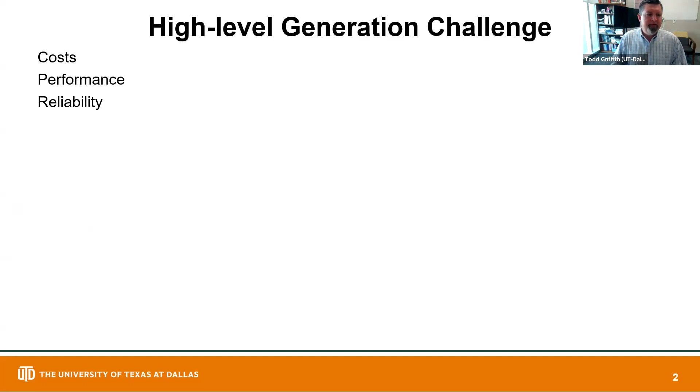I want to start with our high-level challenge for designing a renewable energy generation system. Anytime I start a design problem, the three things I'm primarily thinking about are cost, performance, and reliability. Costs need to be competitive with other generation sources. To do that, we need high performance in terms of efficiency of the generation system. And of course, the system needs to be reliable, providing power for its 20 to 30-year design life. The primary metric we focus on is the levelized cost of energy, or LCOE—this is dollars per kilowatt hour or cents per kilowatt hour, the generation cost of electricity.

We can think about cost, performance, and reliability folding into the terms on the right-hand side of the equation. We have upfront capital cost, our capital expenditures. In terms of performance, we're focused on AEP, the annual energy production over the lifetime of the asset. And then we have operational expenditures over the lifetime of these machines, including operations and maintenance costs, which is where the reliability factor comes in. So in order to keep the LCOE low and competitive, we need to focus on cost, performance, and reliability.

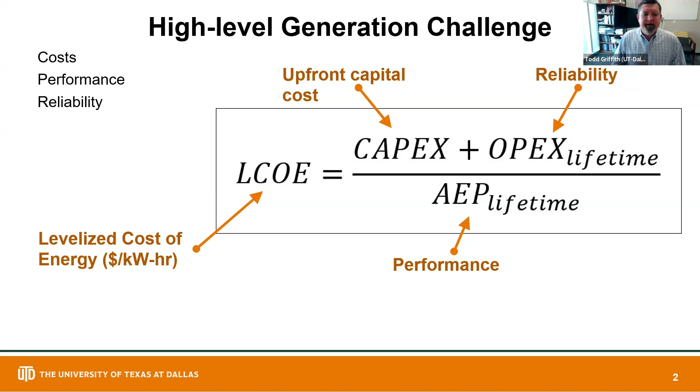Most of my presentation today is going to look at research we're doing related to offshore wind, and at a high level there are a number of opportunities and challenges. In terms of opportunities, offshore wind is important because these wind farms can be placed in relatively close proximity to major population centers that live on the coast—think East Coast, West Coast. The wind resource is very consistent and strong. There's a lot of space out there, and we're not limited in terms of size. These are truly massive extreme scale machines—we're talking blade lengths of over 120 meters, so the length of a blade is more than the length of a football field. Going offshore also has lesser issues in terms of transporting these large components.

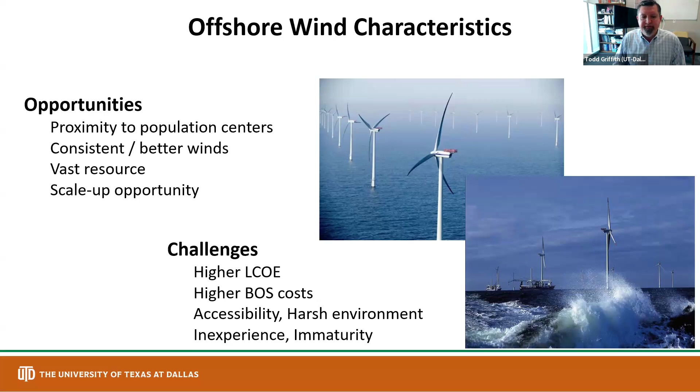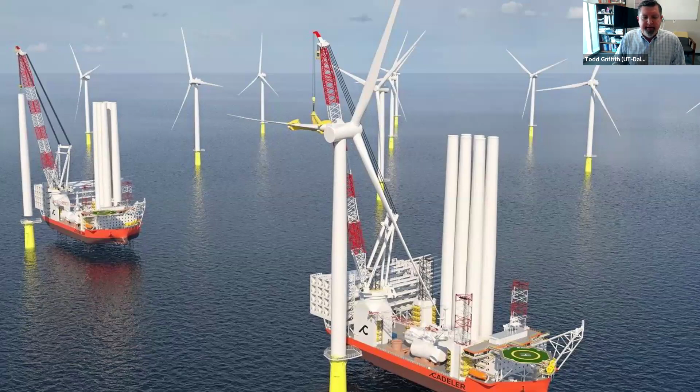Here's a schematic showing an artist's rendering of what an offshore wind farm installation would look like. One thing I want to emphasize are these two large vessels—jack-up vessels. These are ships that can go to port, pick up blades, towers, mechanical components, the nacelle. They house a large crane. They move to site, and then they're jacked up—they have long feet that extend down to the seafloor and jack up the hull of the vessel. Then the crane installs the components piece by piece. This typical process can take many days or maybe several weeks to install a single machine.

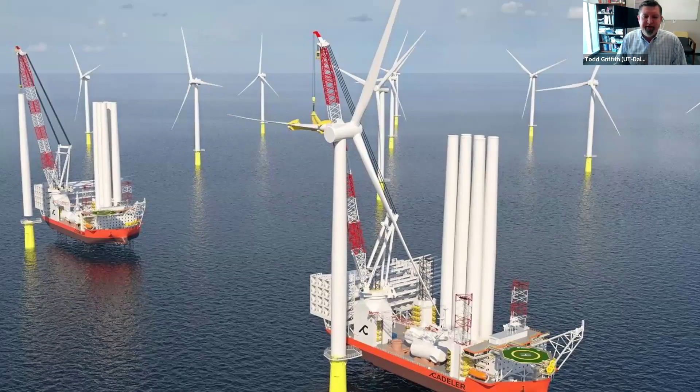There are a number of machines on the market today as well. This is truly a global industry. In the US, the top wind turbine supplier is General Electric, GE. Goldwind is a major supplier in China and growing around the world. Then there are two major Danish manufacturers, Vestas and Siemens Gamesa. These four companies constitute a really large percentage of the overall market.

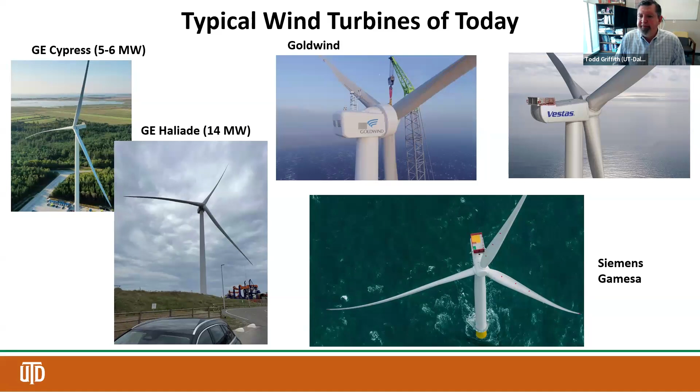I wanted to comment on siting as well. Where are we seeing the most activity? In terms of siting wind turbines and wind farms, it's kind of like real estate—location, location, location. If we look at the upper right plot, we see a graph of wind speed at an elevation above the ground of 80 meters, and that deep red color is the highest average wind speeds on the map. It's mostly concentrated in the U.S. Great Plains area, the central and mountain time zone area. That resource is very strong, there's more ability to capture power there, and that's where we've seen, as you might expect, most of the installation in the U.S.

Over the past 20 years in Texas, Oklahoma, Kansas, Iowa, and many other states in that area, and really there's significant growth in New Mexico and Colorado as well in recent years.

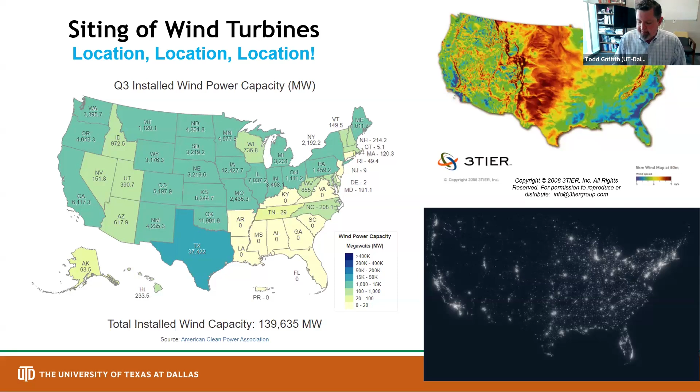One of the challenges is transmission. If we look at sky glow in the lower right, we see an indication of where the major population centers are in the Northeast U.S. and along the West Coast. So one of the challenges has been transmission of this power, but also it opens up a lot of interest in offshore wind as well, having power generation much closer to the end user.

There are a number of other benefits too. Landowners and local communities receive lease payments and tax payments as well, and that can account for hundreds of millions of dollars of annual revenues and incomes.

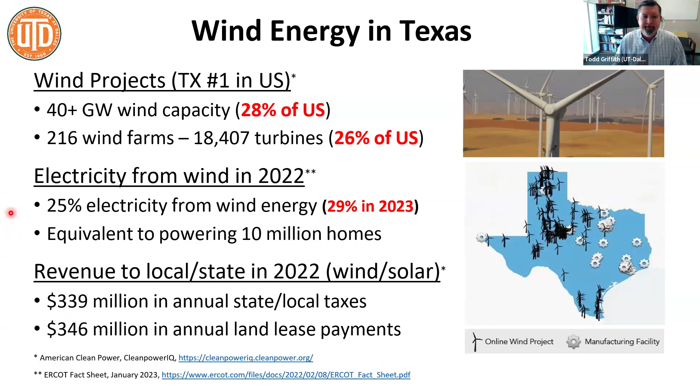And then, kind of the last slide here on this introduction, just looking at a few of the industry trends and challenges. I mentioned these are the largest rotating systems in the world. We're looking at towers up to 150 meters in height, blades 110, even up to 140-meter blades out there now as well. Cost is a big factor.

And then you see an image down here of transporting — now that's a 37 meter blade. So just imagine transporting a 70, 80, 100 meter blade.

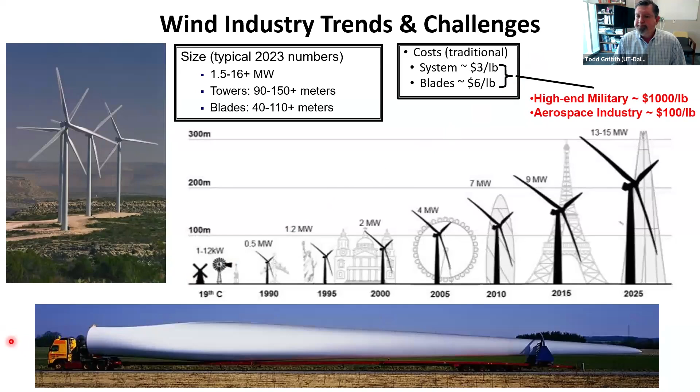So the rest of this, I'm going to dive into some of the technical work. The first thing I want to cover is some of the work we've been doing broadly in the area of wind turbine design. Hopefully by now you've kind of gotten an idea of some of the challenges in terms of going bigger and bigger, and thinking about how we're designing these systems for relatively harsh environments.

If we're going offshore, we have to design for the worst conditions that machine might see — it could include maybe a hurricane type wind. If we're on land, we have to design for major storm conditions. A lot of the work that we've done in our group has really been focused on exploring the limits of the technology, especially going bigger and bigger. Years ago, we did a 100 meter blade design at Sandia.

Since then, we've gone on to do up to a 250 meter blade design, which is structurally feasible. But no matter what the size of the blade, there are a number of structural design requirements that must be satisfied. So let's say we're designing a blade — you see a CAD model over here on the left side. When we're designing that blade, we need to check a number of failure modes, including what you see here on the right.

Strength check under extreme loads, deflection — we need to make sure the blades do not deflect enough that the blade tip would strike the tower, which is very catastrophic. Fatigue life — these machines must last for their 20 to 30-year design life. Blades are thin-walled structures, so we need to check buckling. And these are rotating systems, so we need to check dynamics and flutter, making sure the system is dynamically stable.

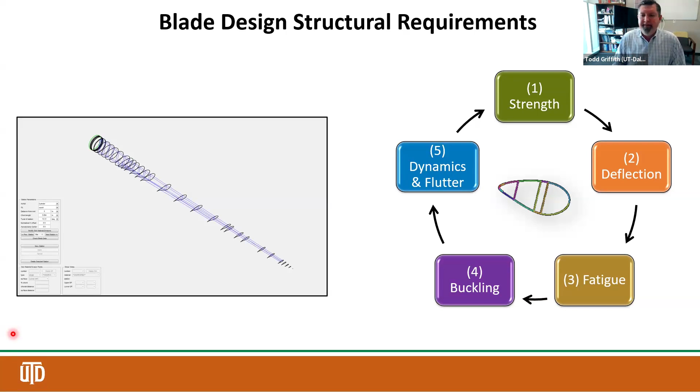So no matter what type of wind turbine design that we're developing, at any scale, at any configuration, these are the things we must check.

Our primary focus here is, again, developing large rotors and new wind turbine designs within our group here at UT Dallas. I've broken this slide down showing on the left some different wind turbine concepts for different configurations, and on the right side, different technologies that could be applied to any of the configurations on the left.

It's really the optimal or best combination of these technologies and configurations that can lead to the best solutions going forward for all the different environments that we're interested in, whether it be on land, shallow water, or even deeper water where we need floating systems.

In terms of configurations, there are upwind configurations. Imagine the wind is coming from left to right on this page - this is the upwind configuration where the blades are upwind of the tower. We've been exploring downwind configurations where the blades are downwind of the tower, which has advantages in terms of the wind typically pushing the blades away from the tower, easing some of the tower strike deflection concerns.

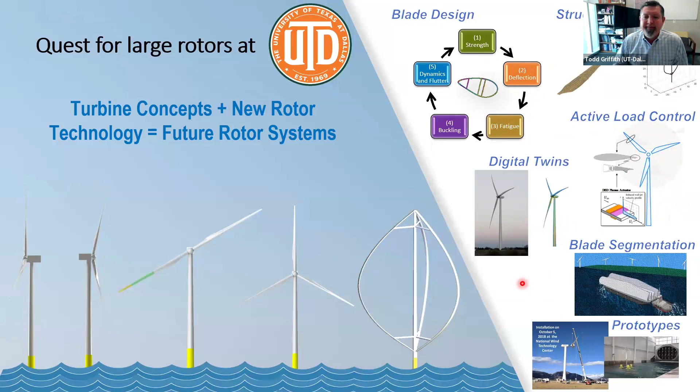If you're interested to read more about some of the scientific challenges of wind energy, there's a series of articles out there called the Grand Challenges articles. In 2019, the first article in that series was produced, and it outlined three primary grand challenges.

The first being improved understanding of the wind resource and the wind flow within the wind plant. There's a lot of great work ongoing in this area at Sandia currently in terms of measurement technologies, but also wind farm, wind plant CFD modeling. My colleagues here at UT Dallas are also doing a lot of great work in terms of LIDARs for measuring wind plant flows and CFD analysis.

The second grand challenge was outlined as addressing the structural and system dynamics of the largest rotating machines in the world. That's really the one that my research primarily focuses on. My students and I are aimed at developing cost-effective, reliable systems that can work for the long term.

In doing that, you really need to develop solutions that work across all scales. That's really what the sketch here shows, starting at the material scale onto the blade scale and then the turbine scale, ensuring the system is reliable and dynamically stable.

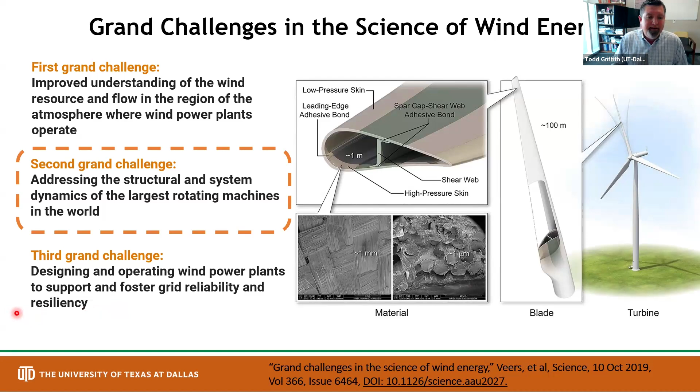There was a third grand challenge: designing and operating wind plants to support and foster grid reliability and resiliency. We work some in that area too. Our work in the digital twin area really falls into that stage, because once we design and deploy the systems, we also must operate them effectively as well.

There are a number of things I could cover here, but I decided one interesting topic, perhaps of interest for this group, would be looking at the aeroelastic behavior of wind turbine systems. With machines growing larger and larger, aeroelastic stability is just becoming a much greater area of interest.

Years ago, for smaller blades of 10 to 20 meters in length, dynamic instability was not such a big issue. But now that we're going to these extreme scales, this is becoming much, much more of an issue. You see in the upper right a video of this galloping bridge - you may recall, almost 100 years ago now, the Tacoma Bridge failure. This is a wind-induced dynamic instability, and we can have similar types of issues occurring in wind blades.

If we look in the lower right here on this flow chart, I've listed four types of dynamic instabilities that could occur: classical flutter, edgewise vibration, vortex-induced vibration, and stall flutter. In gray, these are the instabilities that have been of most concern up to now in wind turbine design, and those have also been the focus of our research here at UT Dallas - work that started when I was a Sandia lab staff member.

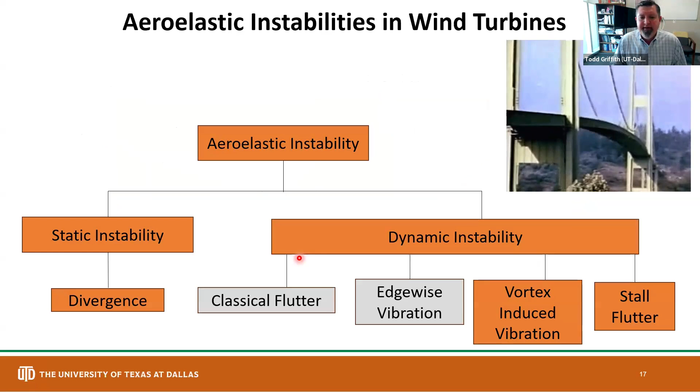So the behavior we're talking about here is actually very similar to the behavior you're seeing in that video there. You could also think about the classical vortex-induced vibration case of a cylinder in cross-flow. When you have flow over that cylinder, if you recall the Strouhal number, under the right conditions a lock-in can occur, and that cylinder will begin to move or vibrate transverse to the flow. That's what we're talking about here.

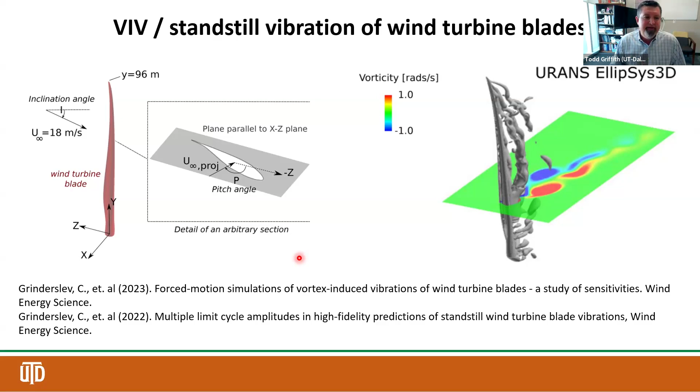Except we have a much more complicated geometry. We have many other variables in play that can lead to excessive vibrations, even in the parked standstill condition.

So that's VIV. There's been a lot of work in edgewise vibration as well. As these blades get longer and longer, they tend to get more slender, and we tend to have more issues in terms of flexibility and vibration in the so-called edgewise direction, which is the chordwise direction along the airfoil of the blade.

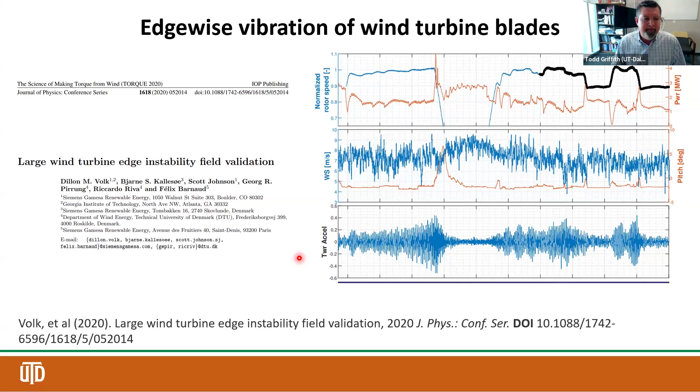As we upscale the blade, the frequencies go down as 1 over your scale factor. So if your scale factor is 2, say you're doubling the length of the blade, your frequency will go down by half. That indicates how these blades are just getting more and more flexible as they get larger. So that is a bending frequency.

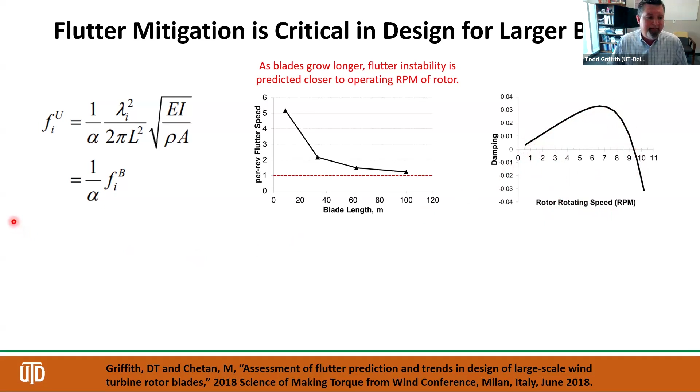That's our analysis procedure. I mentioned earlier the Sandia 100-meter blades are actually a series of 4 of those blades, all same length, all 100-meter blades, but the focus of the work was on optimizing the blade mass to make it as lightweight and low cost as possible. But what happened as we did that, we reduced the flutter speed significantly as we went along. So in all those cases the flutter speed was still safe, but we were getting closer and closer to an instability.

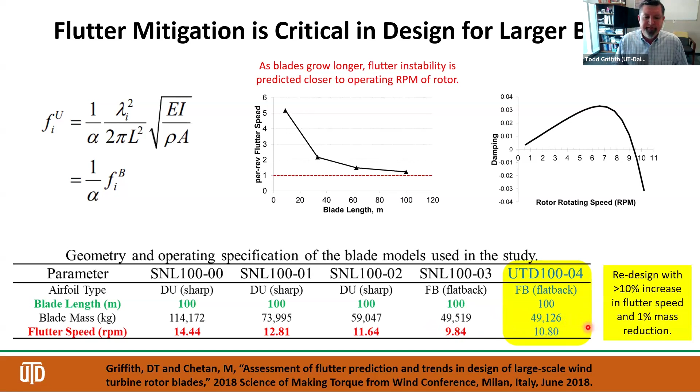We did some work here at UT Dallas looking at how we could optimize the structural design to mitigate that. Through careful placement of mass around cross sections, we were able to increase the flutter speed by more than 10%, and at the same time reduce the blade mass around 1%. So there are some things we can do in terms of structural design and airfoils to mitigate flutter.

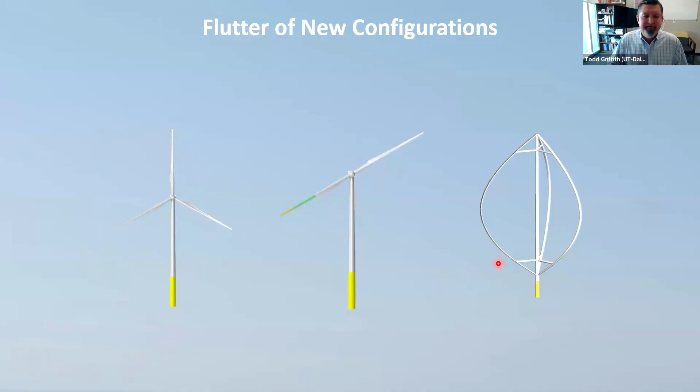A lot of our work, as I mentioned before, is focused on new configurations. I just showed results for flutter analysis of the traditional 3-bladed upwind design, but we've also been looking at 2-bladed designs and vertical axis, which is really a new area for aeroelastic stability analysis. So we asked: if you were to compare aeroelastic instabilities for 2 versus 3-bladed machines, how might they compare? And ultimately, are there any advantages of two-bladed design over three-bladed design when it comes to aeroelastic stability?

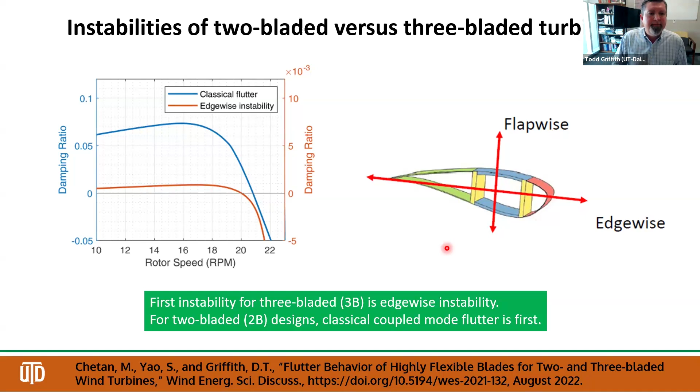All right, so I talked about three-bladed and two-bladed designs, but what about floating vertical axis rotors? We've been working on developing a floating vertical axis wind system, or VAWT—we just call it a VOT—with support from the DOE ARPA-E. Here's a case where we're also designing a really large scale system, and we're concerned about the stability of these rotors, so we asked a number of questions.

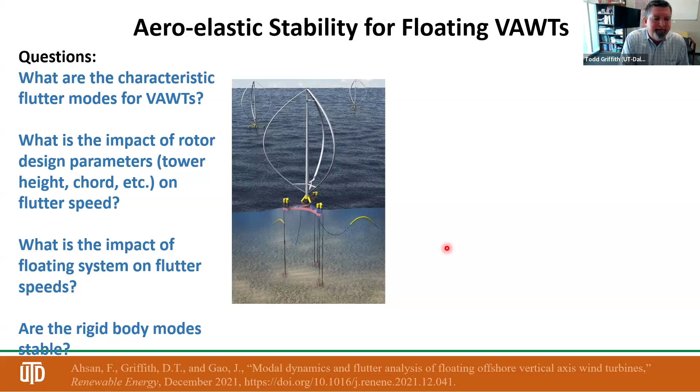What are the typical flutter modes? What's the impact of different design parameters? How about the floating system, how does that impact the design? It's a little different here in terms of what types of modes go unstable. For vertical axis wind turbines, it's primarily a tower mode that we're concerned about going unstable, rather than individual blade bending modes. I'm going to speed up a bit to get to other topics.

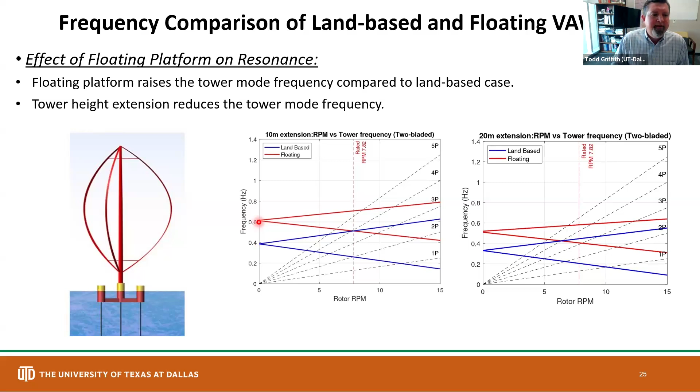The floating system has a very major impact on boosting the frequency. If we take a vertical axis rotor on land and move that same machine offshore, the floating system, by changing that base boundary condition, moves those frequencies higher, which improves our ability to avoid resonance conditions.

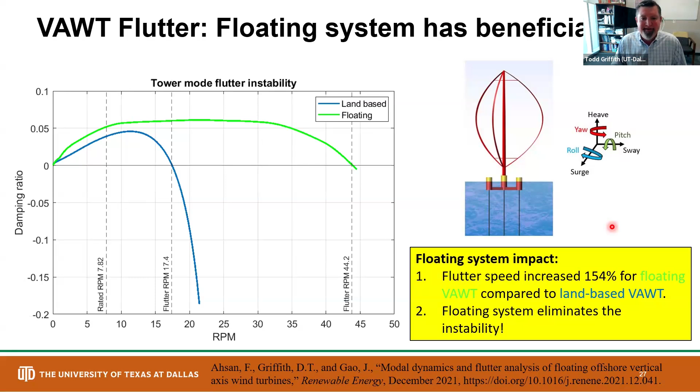It's really a great result because it gives us extra margin we could take advantage of in the design process. This is one of the results I always get excited about, because we're just taking the same design and changing that base boundary condition. It's a big advantage of moving offshore, and we have enough challenges as it is moving offshore, so it's nice to have these kinds of benefits.

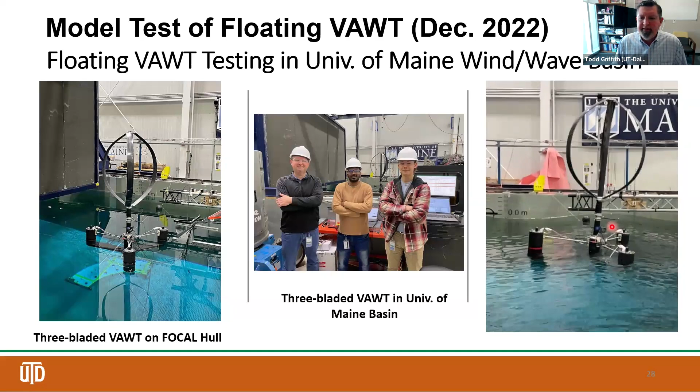All right, so part two, I want to tell you a little bit about some of the work we're doing in digital twins for wind turbines.

This is an area where there are actually a number of definitions now. This is really an emerging and exciting field. My definition is a digital twin is a numerical model of a real asset, or a wind turbine, and it should be a model that can be periodically updated with new information and new data as it becomes available over the lifetime of the machine.

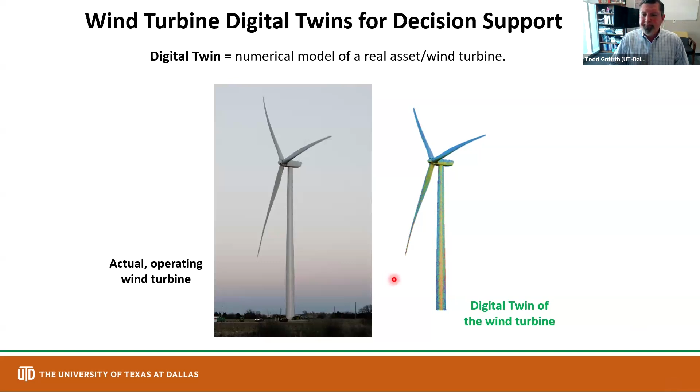We started a digital twin project to support our WindStar industry consortium. The members of this consortium, many of them owner-operators who own and operate wind turbines, have all these machines out in the field, and they love to have models of those machines, such as OpenFAST aeroelastic models, so they can do studies to say: there's something happening with my machine, my check engine light went off.

What's going on? I could really use a model to help me troubleshoot what's going on. Maybe there's an underperformance issue, a power underproduction. These models, the same type we use for design, can be used for decision support in wind farm operations. Maybe you've added a new control system to a machine - having a model could let you evaluate and make sure your new control actions are done safely. When we started working on this, the first thing we realized is how challenging it was to gather data.

There's really limited data available to build the type of models we want. So what we focused on for the first year of this project is how can we develop these OpenFAST digital twin models based on limited data.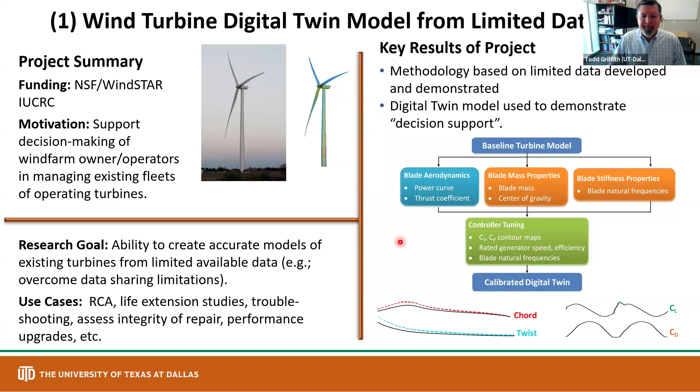The basic idea is to start with some baseline reference wind turbine, and then do some adjustment to aerodynamics, blade mass properties, blade stiffness properties, tune the controller, and then we'll have a calibrated digital twin model. We're building upon an existing reference model, and our methodology is basically to scale some of the parameters.

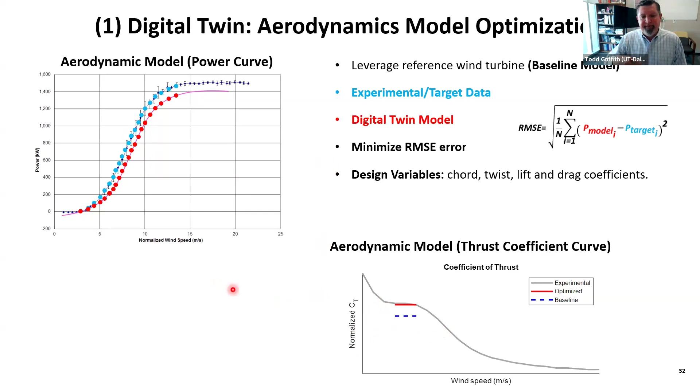To improve this, we've also added the thrust coefficient as a function of wind speed. So our limited data in this case is a power curve and thrust coefficients, and that gives us an ability to get the loads correct in terms of the torque load and the thrust loading on the rotor. That's really, really important for this overall model to be useful.

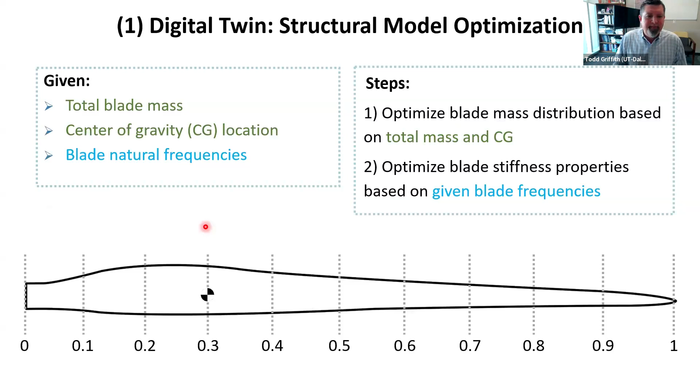For the structural model, we need mass properties - blade mass, blade center of gravity, some blade frequencies - and we use all that information to adjust the stiffness and mass properties of the rotor. We've shown this approach based on limited data to be very successful. In fact, the last thing we've done for our WindSTAR members is develop a graphical user interface that's very user-friendly. The user can input all of this target data, and the output is an OpenFAST model that represents your wind turbine. So that's a product of this work.

Something else we worked on is a multi-fidelity digital twin. OpenFAST models will typically have some kind of low fidelity aerodynamics and low fidelity structural models. But what if you go out in the field and you have a crack in the blade? Is that blade going to be safe to operate? Let's say we repair the crack.

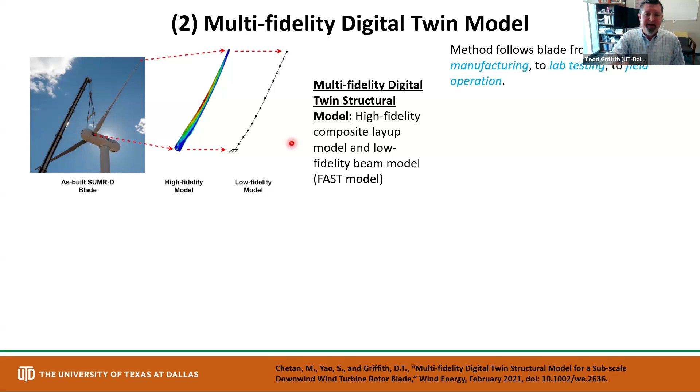To manufacturing, to lab testing before blades are installed, and all the way into field operation. We're gathering data throughout this process. This overcomes the limitations I mentioned for the prior case, where we're looking at machines already out in the field with no information about design, manufacturing, or lab testing. Really, all we have is field operational data. Here's a flow chart of how we gather all that information throughout its lifetime.

We had an opportunity to demonstrate this process with a blade we designed a few years ago. I'll show you here, but it's actually right here - it's a two-bladed design that was tested at the NREL National Wind Technology Center for a few years. This is a 20% scaled version of a 105-meter blade, so this is a 21 meter blade, and our group here at UT Dallas was responsible for designing the structure for this blade.

The multi-fidelity digital twin has a lot of benefits. Number one, ensuring safety requirements are confirmed using the high fidelity model. In this case, this was a very innovative, highly flexible blade design - we were pushing the margins of performance, developing this digital twin model starting with our design, following manufacturing. We did testing, we gathered more data. This gave us a lot of confidence going into operation that this blade would perform safely. It's something you can implement for all major components - I'm showing for a blade, but you can do a multi-fidelity digital twin for drivetrain, tower, any component you want.

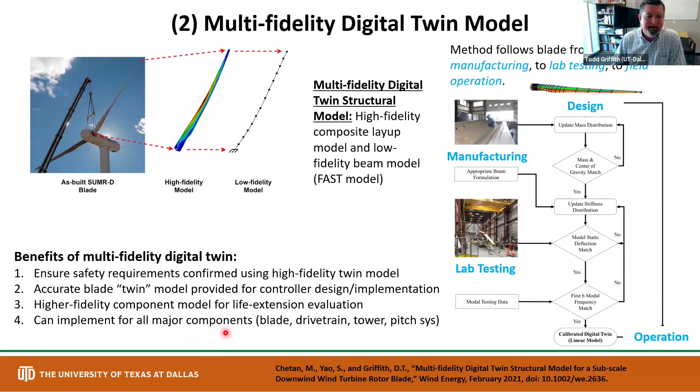I wanted to point out some of the data we were able to gather throughout the manufacturing stage. We designed this blade, but once it went to the composite fabrication shop, there were some changes that happened, some intentional, some not. We were able to account for layup extensions, deviations in the adhesives and overlays, excessive paint, addition of components that weren't in our model, like strain gauge wires, balance box, etc. Ultimately, we had a very accurate model that represented the system.

There's another topic here that I think is really important, and I've intentionally put this in chronological order - part one was about design, part two was about operations, and part three is, well, what do we do at the end of life? I want to talk a little about some of the work we've done in sustainable, recyclable materials and manufacturing approaches. A lot of our focus is on what we might do in the design phase so that at the end of the life of a blade, after 20 or 30 years, it can be repurposed, recycled, and so forth.

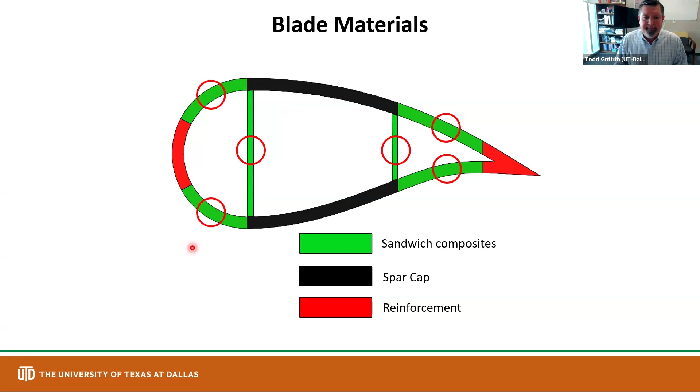I happen to have an example here - I don't know if you can see this on camera, but this is a sandwich composite. On the top and bottom surfaces, you have a fiberglass face sheet, and in between, in this one, you have balsa wood, but it could be foam core or something else. There's really a large amount of sandwich composite in a blade structure, so in terms of sustainability and recyclability, these panels are very important.

Here's a photo showing typical manufacturing of a 75-meter long blade. If you look closely, you can see a full-size human there, just to get an idea of how big these blades truly are. The way these blades are made, material is laid up in the mold - you have these two molds, then you put a bag over it, infuse resin, cure it. After it's cured, one of these molds is hinged, comes over, and you lay one half on top of the other. Think of it like a clamshell, but it's really a major operation, a lot of material input.

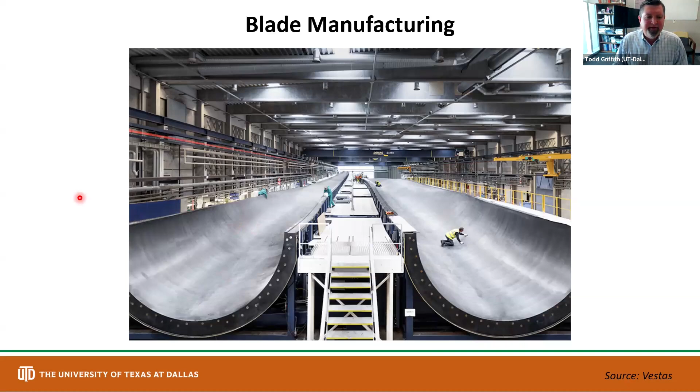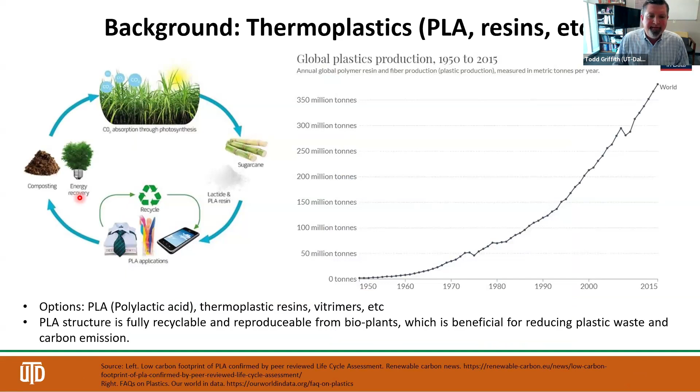Typically, blades are made with epoxy or polyester resins, but there's a lot of interest now in thermoplastics for more sustainable, recyclable blades. One of the things we've been looking at are not only recyclable resins, but also PLA, so potentially using 3D printing in the blade process. As you know, PLA is one of the really common materials used in 3D printing.

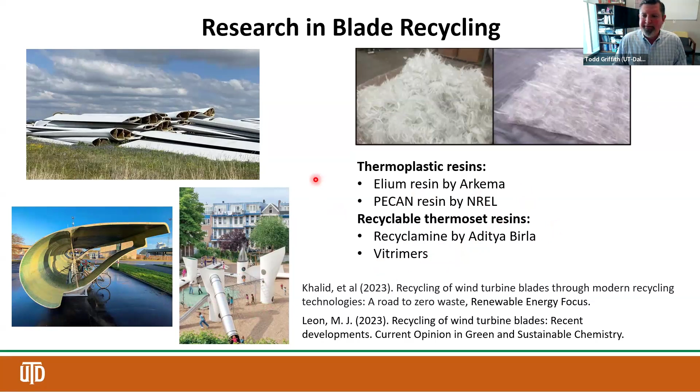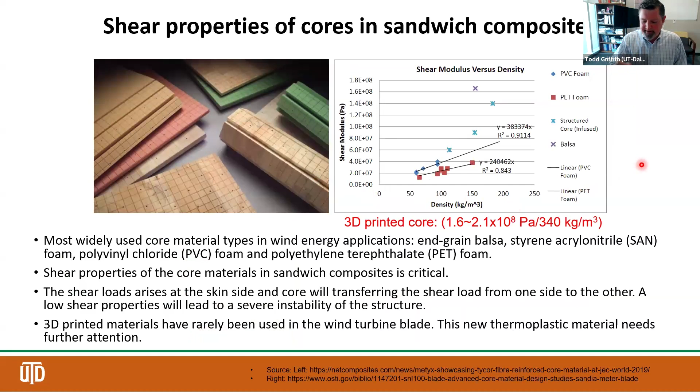So really a lot of exciting work going on there. Kind of our focus has been more on these thermoplastic cores, and really our big interest is in 3D printed core. So I mentioned balsa and foam core, but 3D printing is another great option, we think, for the core material. So one of my students, Dong Yang Cao, did a lot of great work a few years ago studying 3D printed core. This along with some of my colleagues here working in the computational experimental mechanics area, Hongbing Lu and Dong Qian. So we were really interested to know how these 3D printed cores compared to traditional cores, including foam and balsa.

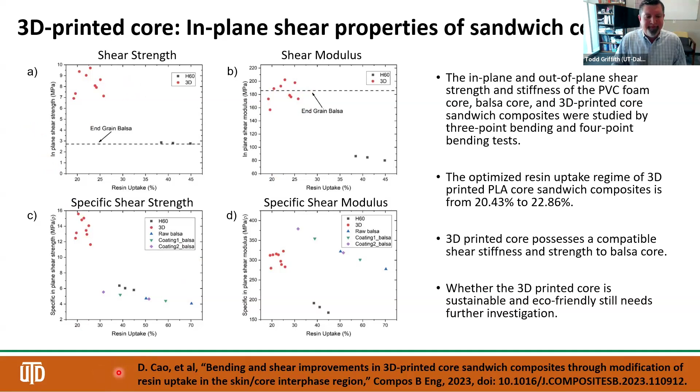And what we found is in terms of strength and modulus, they perform quite well. And you can see all the results there in this composite part B article if you have interest.

Thermoplastics also give us a great opportunity for new joining methods. So we studied two joining methods, the first being resistance welding. So you see two yellow blocks here in this schematic. Those are the blocks applying pressure to these blue thermoplastic substrates. And then in between, you have some metal mesh heating elements. So you heat this metal up and it will liquefy or melt the thermoplastic. And then you turn the power off, and when it cools down, you have a joined structure.

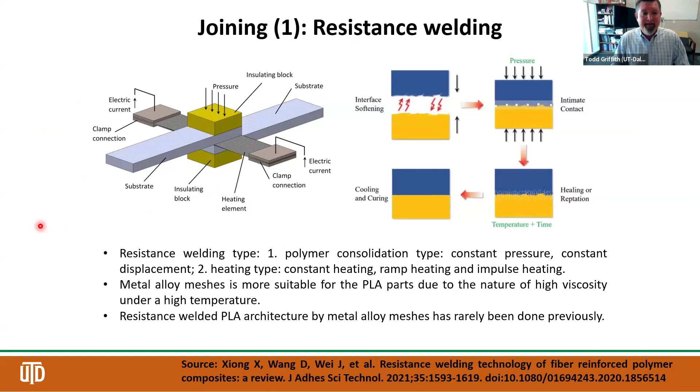And so I was really interested to know how the strength and stiffness of these resistance welded joints looked. And so we fabricated some specimens here at UT Dallas. You see what the interface looks like. You have one polymer and the other polymer being joined here. This one happens to be a white material, 3D printed.

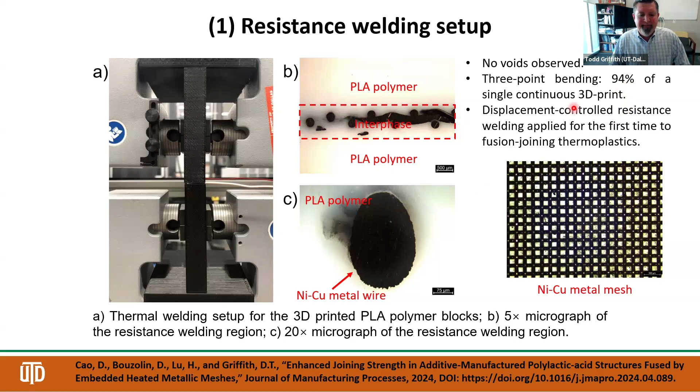Over here you see some black PLA material that's being joined. And then over here on the right, you see the metal mesh that we use. This was a nickel copper, and we found that to be best in terms of performance, in terms of power usage, and so forth. But this technique is very effective. We're able to get to 94% of the properties of the continuous, and that's just kind of initial. I think we can even do better.

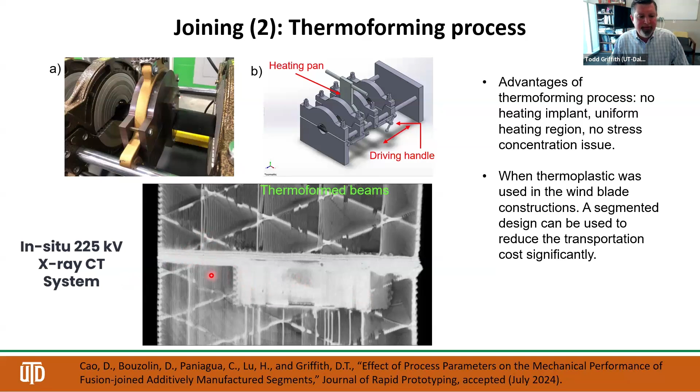We also looked at a thermoforming process where there was no metal mesh. So we're just using a heating element to melt the thermoplastic and then join it together with this apparatus we have here that keeps everything aligned. And we have a 4D CT machine here at UTD. We're able to look internally at the bonding quality, and this is something we can do, 3D as a function of time. It was really interesting to see qualitatively the high quality of this type of bonding approach.

All right, so that brings us to the end.

Wind energy continues to grow. There's a lot of activity on land and especially a lot of new activity offshore. Our focus has been on developing new solutions for, say, new concepts to really help us do better in terms of cost, performance, and reliability for the offshore environment. And we're really excited about the prospects for digitization and digital twins for wind energy as well. We've studied ways to overcome the data sharing issues, and there are some ways to do that and develop some new kind of frameworks for multi-fidelity approaches.

And I want to just say quickly, big thanks to all the students. We love to get together and socialize. One of our big events is annual pumpkin carving. And so we have a lot of folks from all around the world who are joining our group and our first time pumpkin carvers. But, it's my pleasure to present all this here.

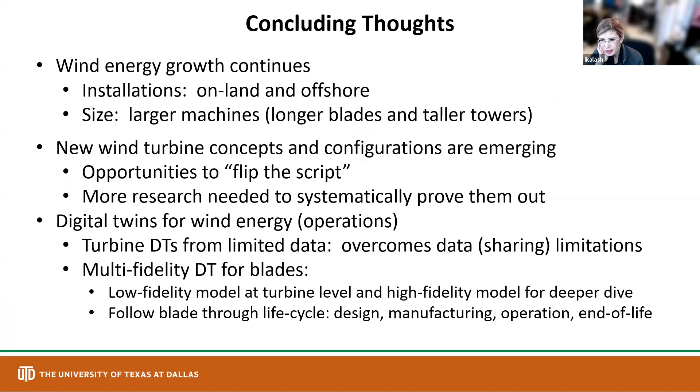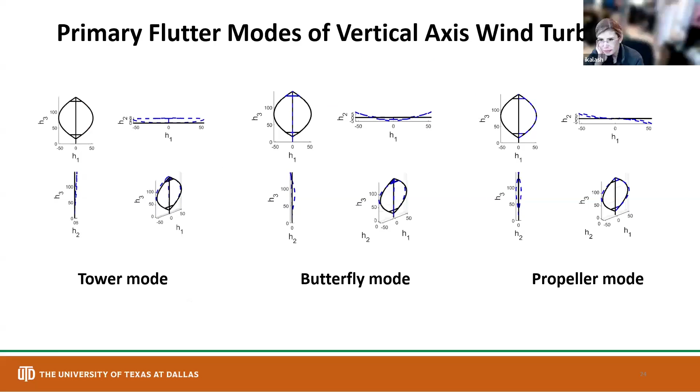Yeah, I mean, you can go bigger with three-bladed, but our findings from a structural point of view, two-bladed is better. You're able to grow the chord size, and it solves a lot of the issues in the chordwise, edgewise direction, in terms of aeroelastic stability, and it also stiffens the blade up for the gravitational loads. So when you go past a 100-meter blade, the gravitational loads are as significant as the aerodynamic loads, so you have to account for that, and the two-bladed makes that easier.

In fairness though, the downside is with two-bladed, when you yaw the machine and reorient for a changing wind direction, you tend to have a bit more vibration into the tower. So rotor design is more favorable at these truly extreme scales, but you probably need a beefier, more costly tower for the two-bladed case.

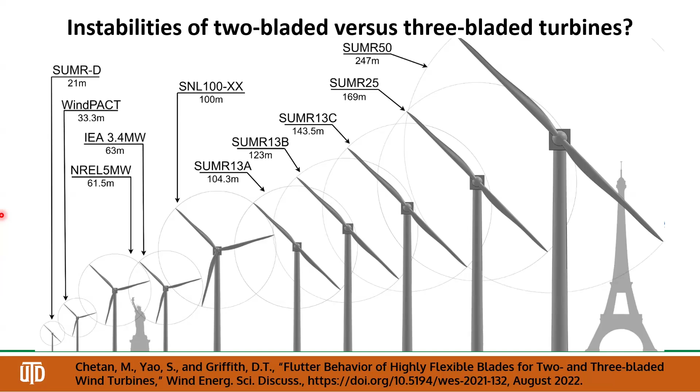Now, in this case, you see a series A, B, and C, and they have 104, 123, and 143 meter blades. We purposely upscaled those machines as a way to reduce cost of energy. For example, this 13A, it's really a 13 megawatt machine. The 13C, we could have operated that as maybe a 16, 17, 18 megawatt machine, but we decided to limit the max power to 13 as a way to cap the design loads, and that will help us reduce the cost. So those are some of the directions the industry is looking - putting a longer blade but not operating it at the full potential power rating.

Okay, thank you. Yeah, thank you. Other questions?